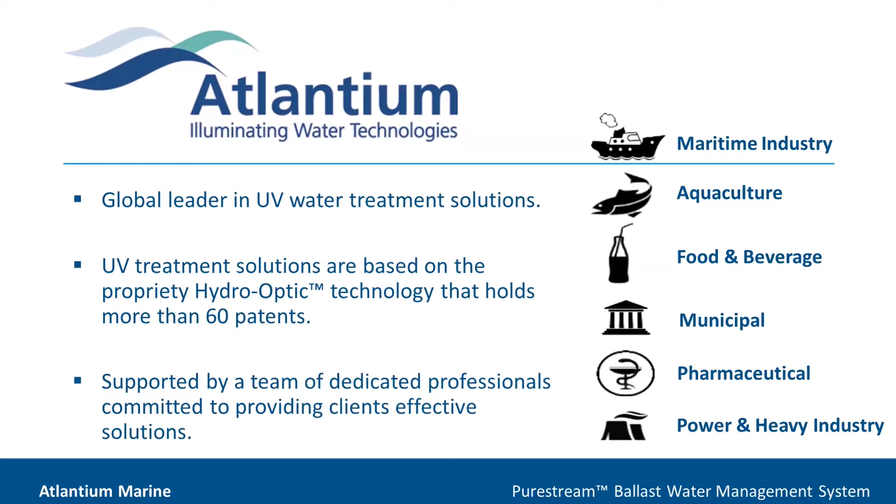We have more than 3,000 installations with global market leaders. Of course, we have a global presence with warehouses, service team, sales support, and all of it.

Regarding ballast water management system, it's a regulatory need under the International Maritime Organization, IMO, and US Coast Guard. Every ship will need to have a validated ballast water management system. Ships trading to the USA will need to have a US Coast Guard validation approval for their system. The US Coast Guard regulation is stricter than the IMO, and it is the market focused.

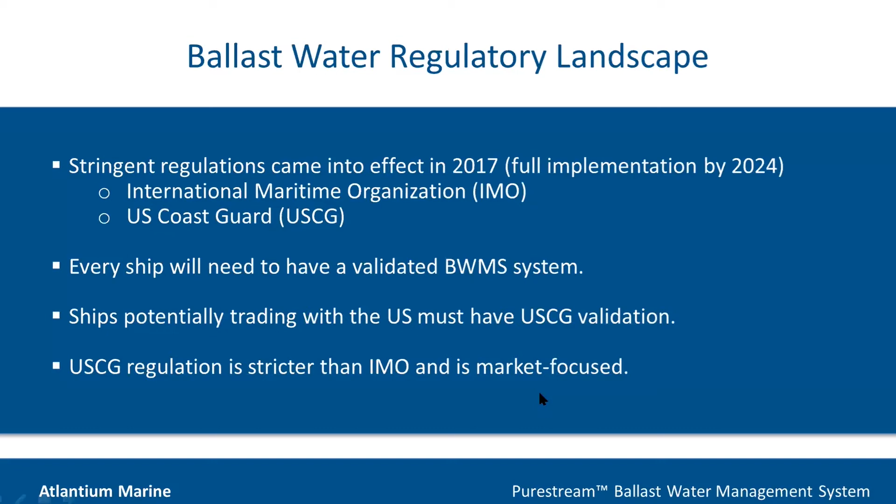Only validated ballast water management systems are authorized to be used. The validation process is divided into two, based on the technology being used for treatment. The G9 is for a chemical-based solution, like active substance, and G8 is for physical treatment, like UV.

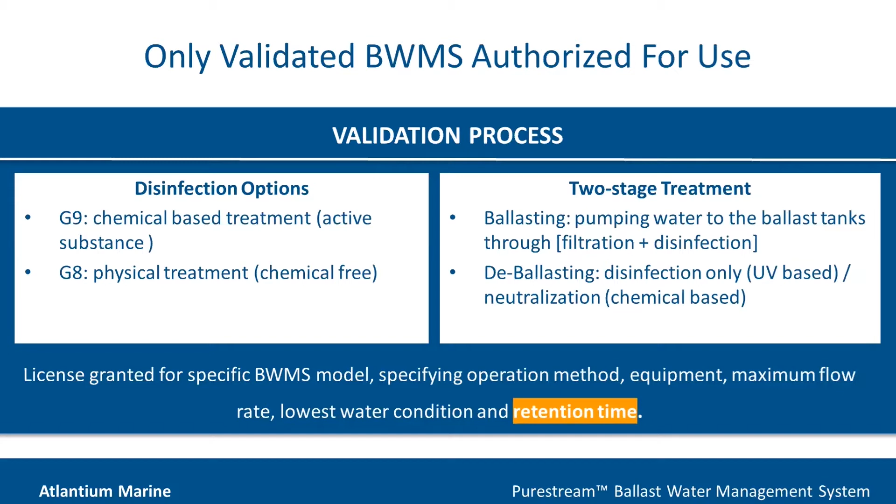There are two stages of treatment: during ballasting, while pumping water to the ballast tank through filtration and disinfection, and while doing the deballasting, disinfection only, for UV-based solutions, or neutralization for chemical-based. License is granted for a specific ballast water system, specifying operational method, equipment, maximum flow rate, lowest water condition, and retention time.

So what is the confidence level for ballast water management systems to meet the regulated standards? The Global Marine Services Group at SGS conducted commissioning tests for 95 ballast water management systems and published its findings in May 2020. So it's a fresh study.

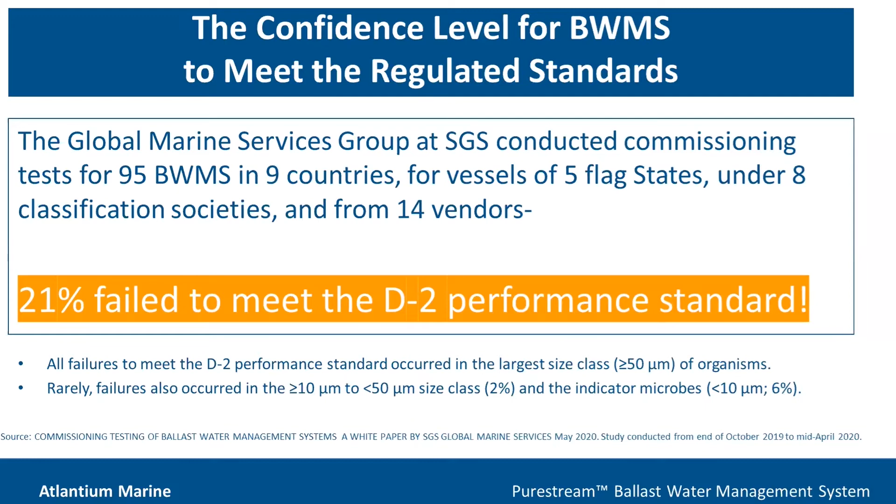21% failed to meet the D2 performance standard. All of them failed with the organism above 50 micron. 2% failed on organism above the allowed level of organism between 10 and 50 micron, and 6% failed for organism below 10 micron.

The ballast water testing is being done during the type approval process while doing land-based testing of the solution against standard conditions and real-time evaluation of the solution during shipboard testing. In addition, commissioning test will be mandatory for 2021, which verifies the performance and installation on vessel.

And soon, the port authorities will conduct from time to time testing of the performance of the system for meeting the regulated standards.

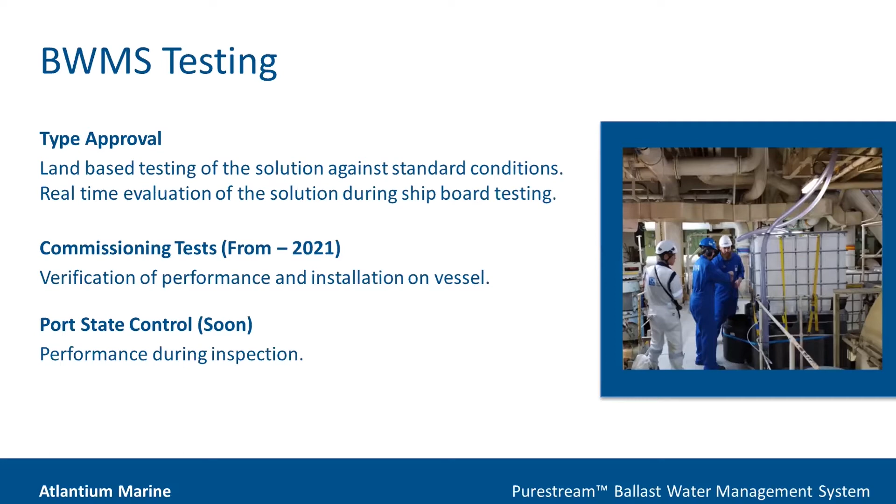So what might go wrong? It all links together. I will start with a disclaimer: the SGS didn't publish the reasons for failures. The analysis that you will see in this presentation is based on my know-how, based on hundreds and thousands of installations globally.

And the analysis that I will share with you is based on UV-based solutions. So the key for success starts with the robustness of the solution design, integration into the vessel, peripheral equipment performance, simplified operation, and the strictness of the validation process.

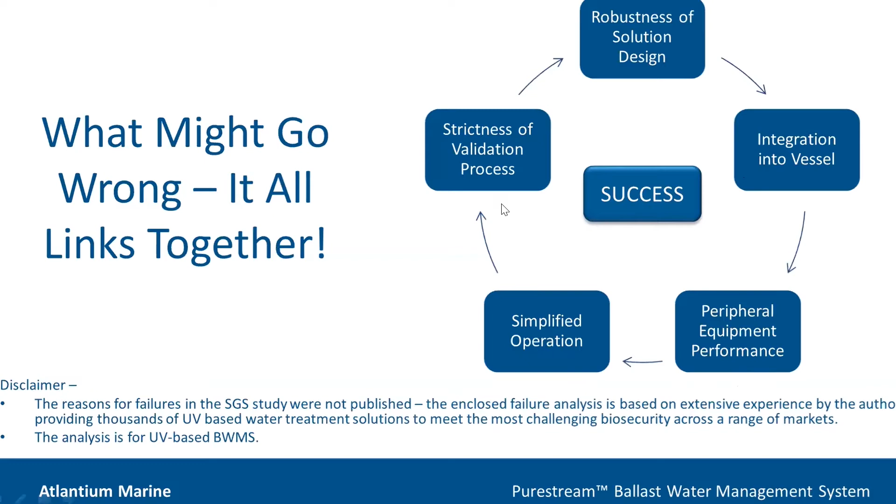I will start with the equipment, with the solution itself, and we'll start with the filter. The goal for the filter is to remove the 50 micron organism and some of the organism between 10 and 50 micron. The filter integrity is essential and important, meaning that no water will leak and bypass the filter media.

So it is highly recommended to use a filter with one filtration element to reduce the risk of water bypassing the filter via the sealing.

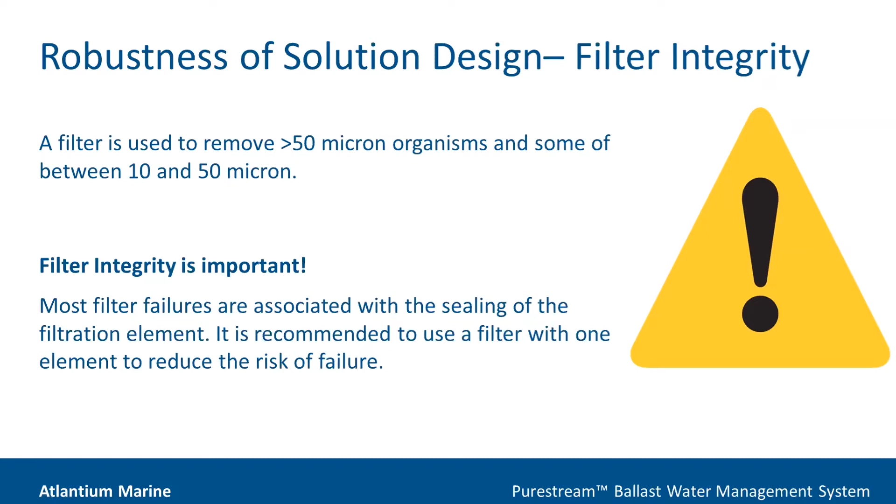The filter micron size, the nominal filtration level, is important. The filtration level actually defines the majority of the size that will be stopped by the filter and will not go through. For example, a 40 micron filter means that 95% of the particles or organism will be rejected and 5% will pass.

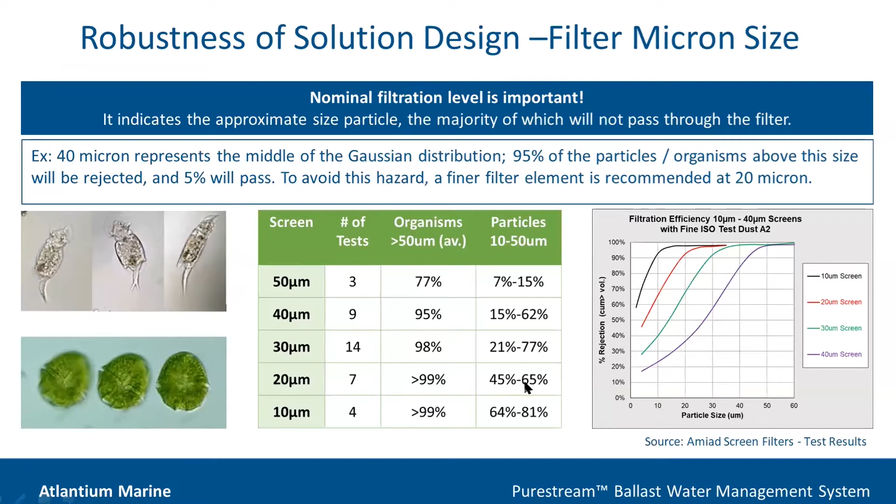The 20 micron performance is such that next to 100% of the microorganisms above 50 micron will be rejected, and around 50% of the organisms between 10 and 50 micron will be rejected by the 20 micron filtration.

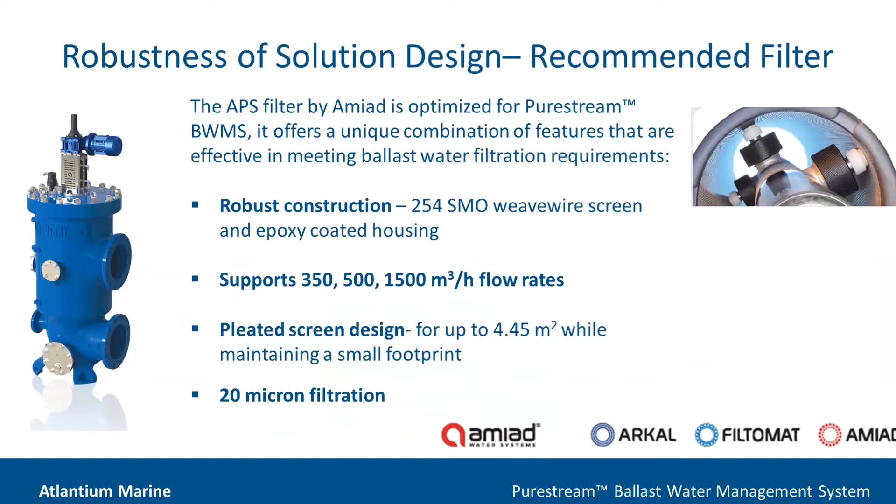We are using a filter that was designed and optimized to our solution. The material of the filter is made from SMO, which is the most resistive material to seawater, with different flow rates and 20 micron filtration. All of it has enhanced backwash in order to take out the organisms and the TSS that were stuck on the filter.

Regarding the UV, it is the physical treatment for disinfection, mainly targeting organisms between 10 and 50 microns and other microorganisms. Some aspects need to be taken into account while implementing a UV-based solution.

The startup time takes about 2 to 5 minutes for the UV to get into full power and deliver the needed energy to kill or inactivate the organisms. During that time, water needs to be flowing via the UV system, and this water is not treated and needs to be considered as such.

Another parameter that needs to be taken into account is the water clarity to UV, which is the UVT, UV transmittance of the water. It is recommended to use solutions that can treat UVT of 45% and below. Our system can treat water down to 40% UVT, which is considered to be very opaque water.

Sensors. The UV dose is not measured directly, so there are a set of sensors that can measure all the dose-related parameters of the UV: the energy of the lamp, the UVT of the water, and the time which is measured by a flow meter. All of those parameters need to be routed to the controller, and by this, the controller will assure that the needed dose is being provided to the water.

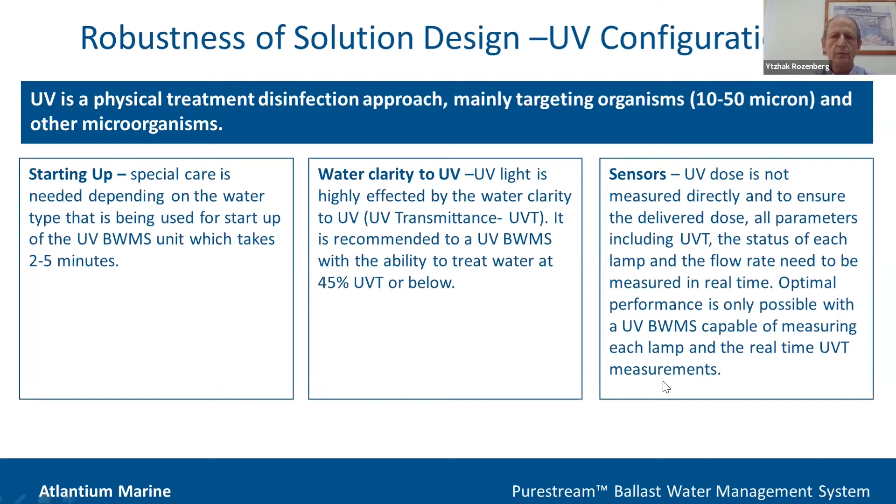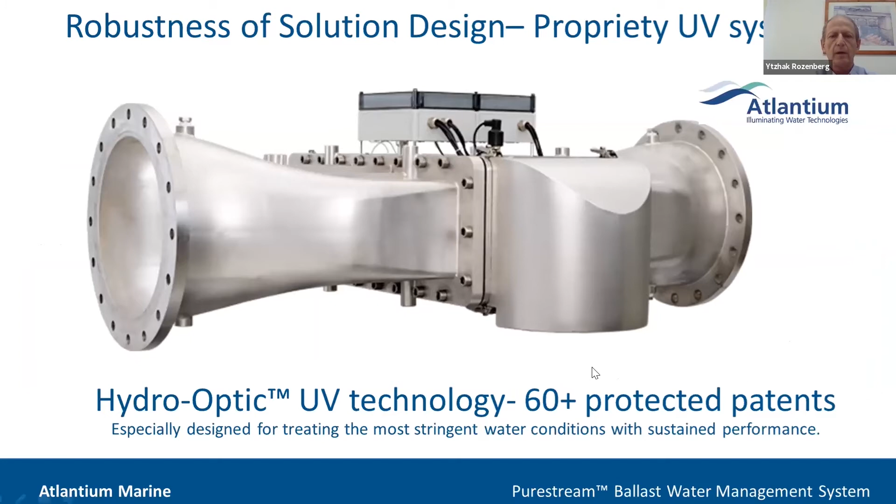Our UV system and solution was especially designed for this application based on our vast experience and know-how. We have in-house all capabilities of designing such reactors. We have designed this reactor to meet very opaque water, as you have seen—40% is considered to be very opaque.

We have a sensor that monitors directly the energy of the lamp, the exact energy of the lamp. And we have another sensor that looks at the lamp via a water column. Both signals represent the exact condition of each one of the lamps and the clarity of the water to UV, which is UVT.

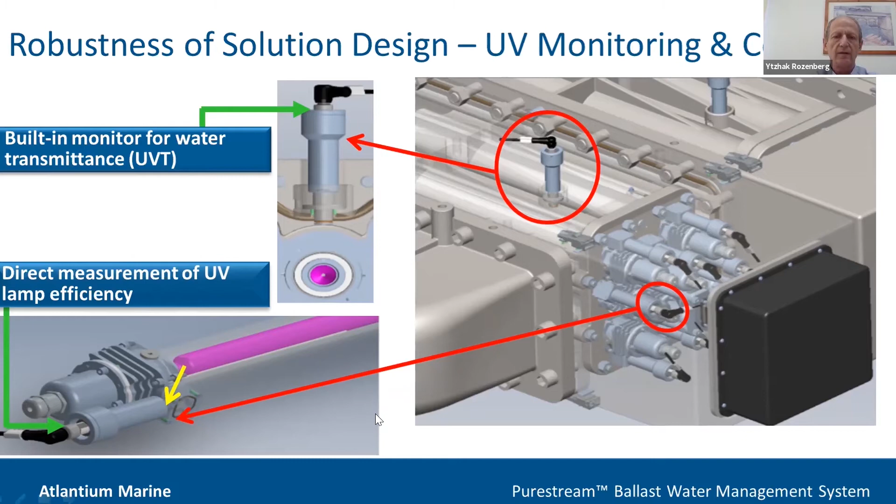This combination, together with the flow meter, gives the controller all those related parameters for assuring that the unit is delivering the exact dose in order to kill the organisms. Different sizes of the systems are used in order to meet the different flow rates on the vessel.

The validation process is well defined. However, challenging the solution within the validation guidelines is recommended, mainly during the land-based testing. During that time, different parameters can be used in the land-based tests.

For challenging the filter, you can load the water with the maximum specified TSS, and by this you can examine the condition or the ability of the filter to backwash itself. Another aspect is to enrich the organisms in the water with ones that have a long shape, in order to see to what extent the filter can prevent those organisms from passing into the treated water.

Another aspect that can be tested is introducing into the water organisms that are considered or known to be resistive to the treatment process. For UV solutions, you can introduce organisms that are resistive to UV. For chemical-based treatment, you can introduce organisms that are resistive to the chemical treatment.

It's important while evaluating the equipment to see the performance immediately after ballasting and before deballasting. By this, you can assess the ability of the unit to treat the water with one treatment, and the regrowth issue that might cause the vessel not to meet the allowed standard.

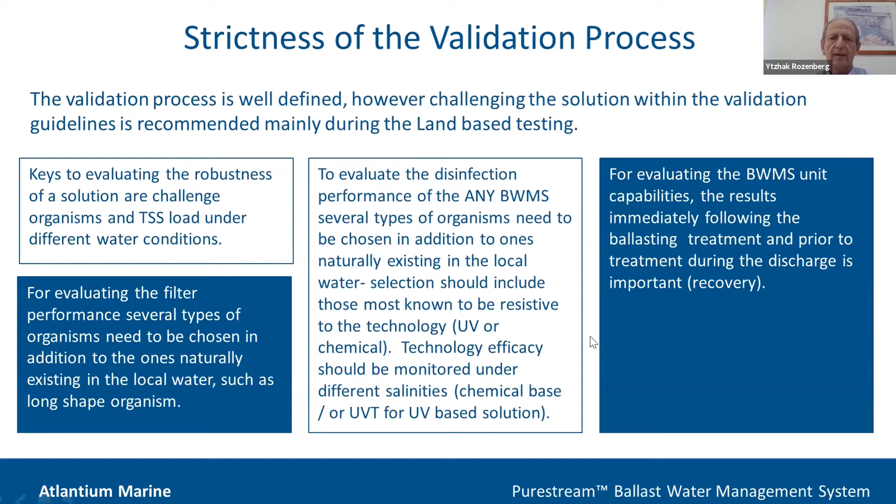Another aspect I mentioned is engineering into the vessel. The ballast water treatment is an add-on to the existing ballast system on the vessel. The additional piping creates dead legs that need to be taken into account by draining, washing, and preventing that water from being discharged before the disinfection or filtration is fully operational.

In addition, when connecting it to the existing ballast system, it's important to make sure that the valves that can route the water for bypassing the solution will not leak, and if accidentally opened, there will be an alarm and notification that something is wrong with the process.

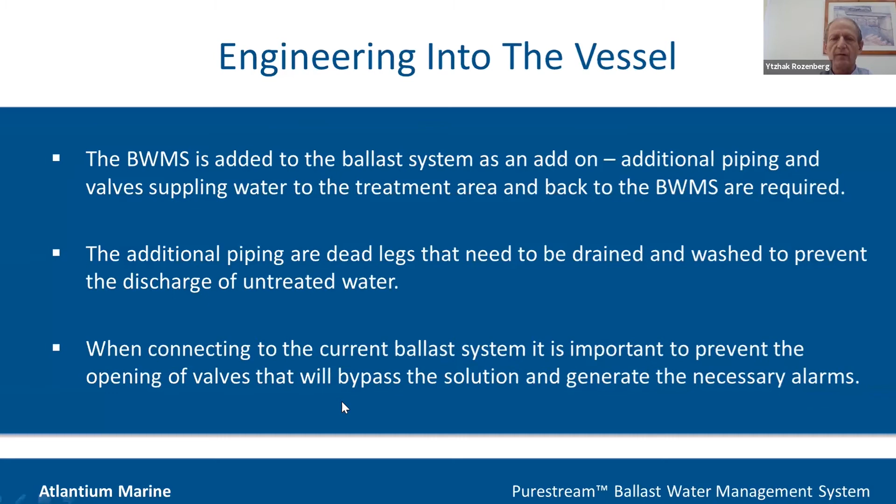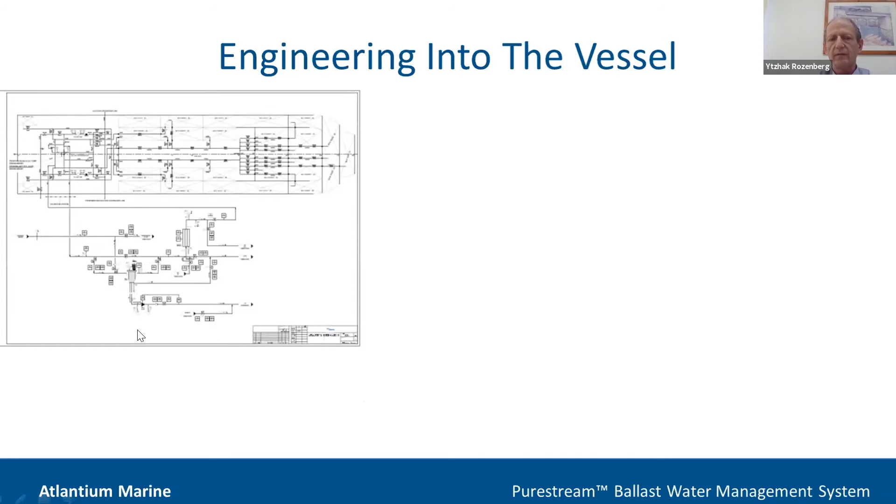I will use a few schematics to share with you the piping that we are adding to the existing vessel. So this is the vessel, and those are the lines that we are adding in order to implement the ballast water treatment on the vessel.

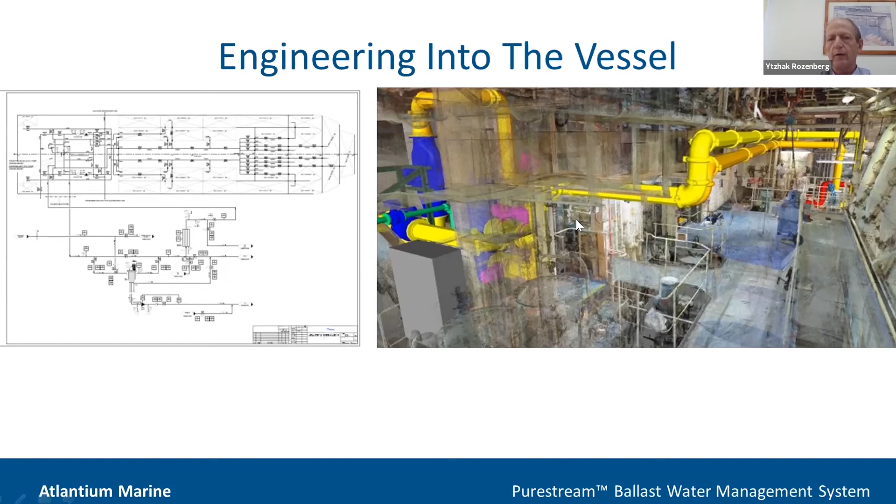I will use another schematic to illustrate what I mean. Those are the ballast pumps, the general purpose pump, and the valves. The red water is untreated water. Over here you can see the filter, the UV, and the outlet pipes to overboard or to the ballast tank.

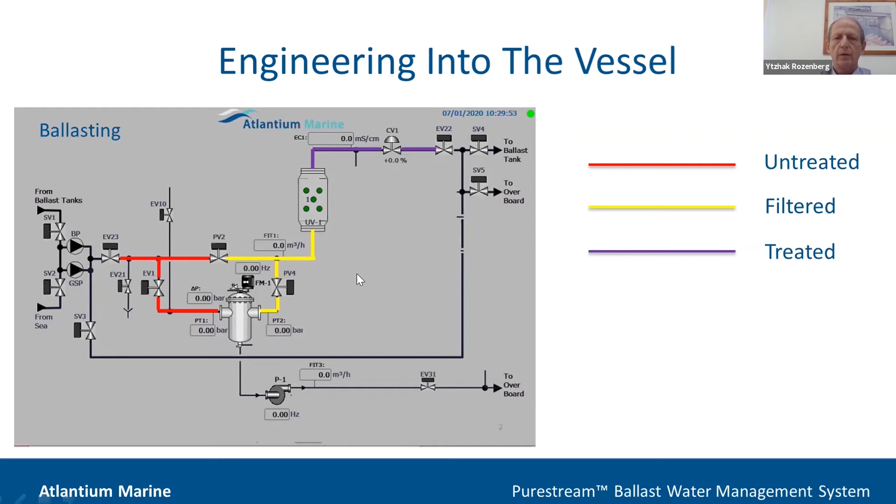So the red color water in this pipe is unfiltered and not UV treated. The yellow is filtered but not UV treated. So this water actually has organisms and shouldn't bypass the UV while starting up. That water will get into the sampling and cause a failure in the process.

Another illustration is water that can leak and bypass the solution. Again, this will be captured by the sampling and the vessel will not meet the regulated standard.

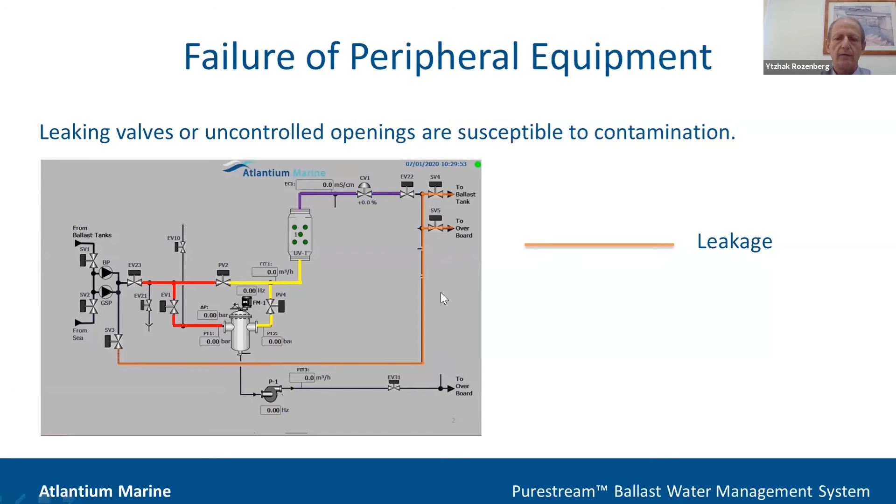Operation-wise, it's highly important to make the operation fully automated and very simple in order to prevent human error. This is another aspect of potential failure during the operation of the system or during its inspection.

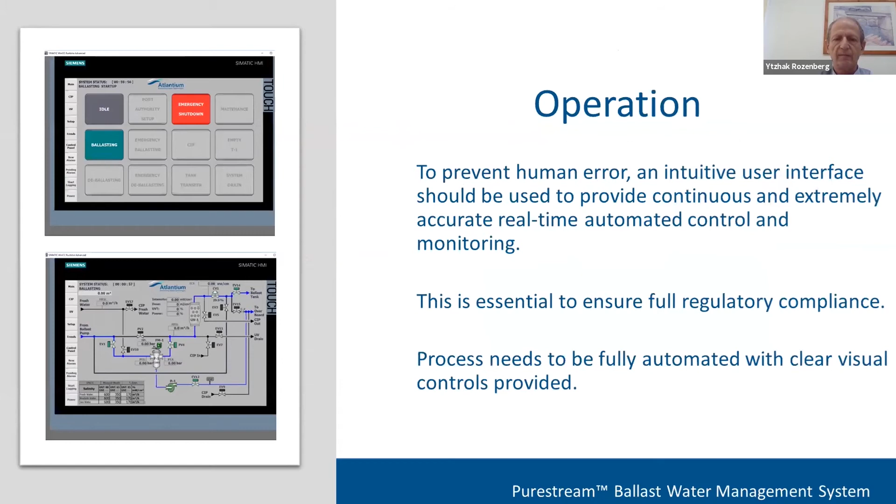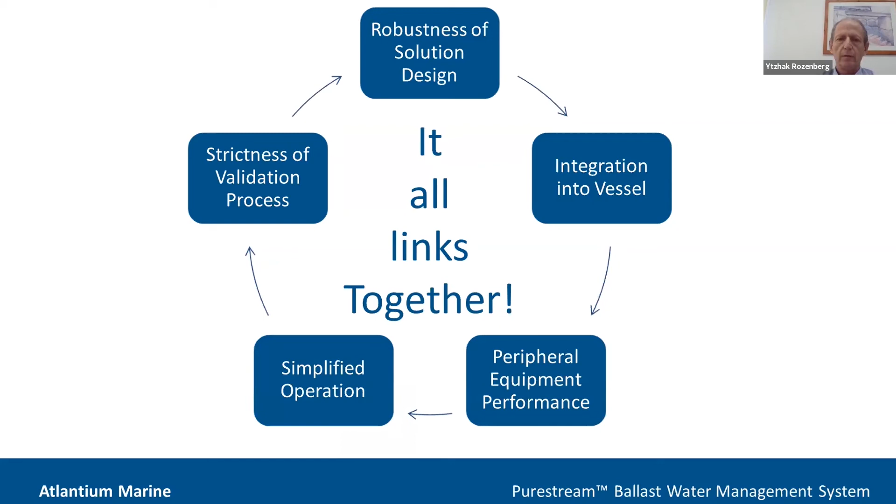So to sum up, it all links together: the robustness of the solution, integration into the vessel, peripheral equipment performance, simplified operation, and strictness of the validation process. We have implemented all that know-how in our solution, in the way that we integrate our solution into the vessel, and by this we do all we can to meet the regulated standard, which is very high and very challenging. I would like to thank you all, and I'm open for questions.